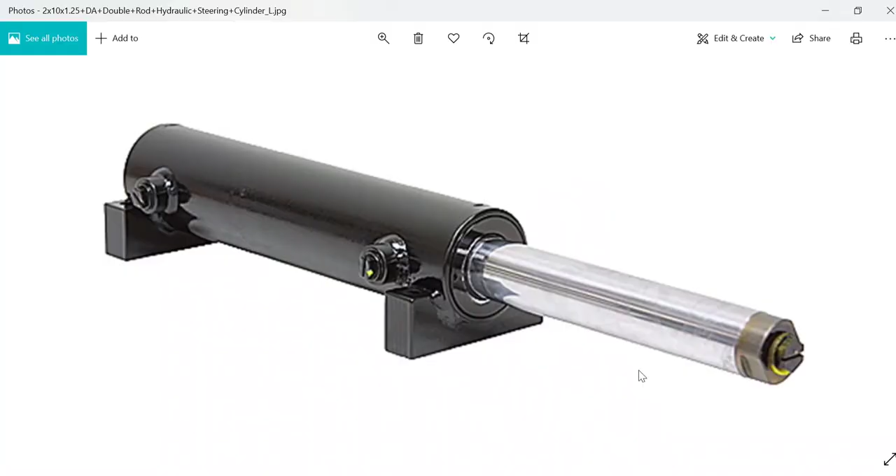So let's see what we're going to solve today. The component we are welding today is a steering cylinder, basically a hydraulic cylinder. This is just an example. It has an inlet port, an outlet port, mounting blocks, and it comes in a single acting or a double acting cylinder.

Let us move on to the 3D component of it, to give you a glimpse of how we convert the drawings into 3D, and then try to conceptualize the entire machine by understanding the cylinder here.

The cylinder you're seeing here is a typical 75 dia cylinder OD, with two ports, inlet and outlet, and two blocks, one on the left, for mounting only. There's another side view where you can see the bore, and an end cap which fits onto the cylinder.

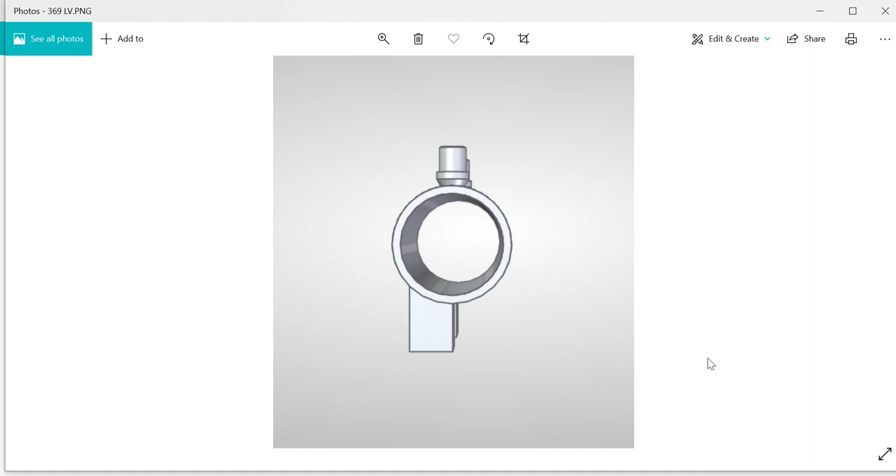So totally we will be welding in about three stages. One will be the ports, inlet and outlet. The second stage will be the blocks, and the third stage will be the end cap, which is not visible right now. So let's move on to the concept, guys.

This is the concept, basically how we design the entire system. Here you see three linear axes and two rotary axes. One is the torch rotary, one is the job rotary, and apart from these two rotary, the linear axes are x-axis, y-axis, and z-axis.

The x-axis is about 500 to 1 meter in stroke; the current system we've designed is about 1 meter. The y-axis is about 500 mm, and the z-axis is about 500 mm. The torch rotation we have limited to 730 to 760 degrees. The B-axis is a continuous rotary system.

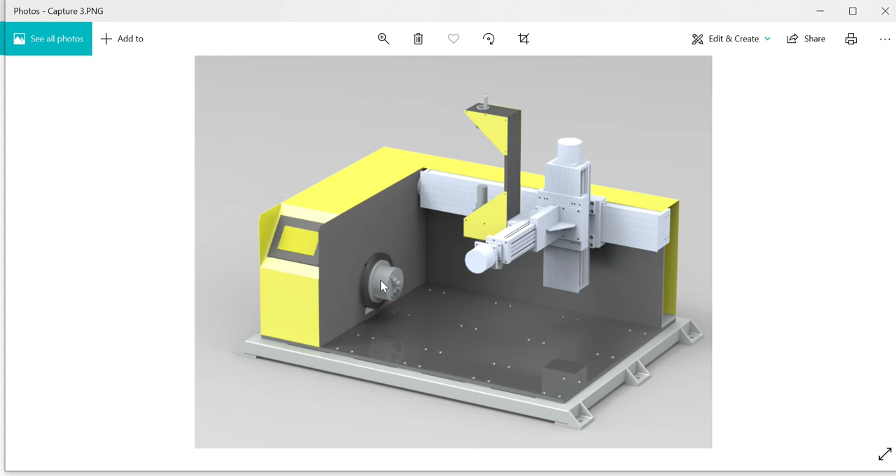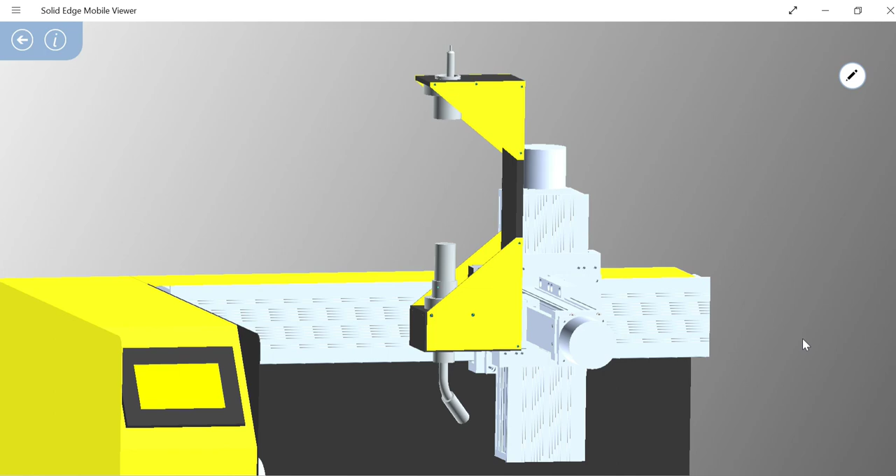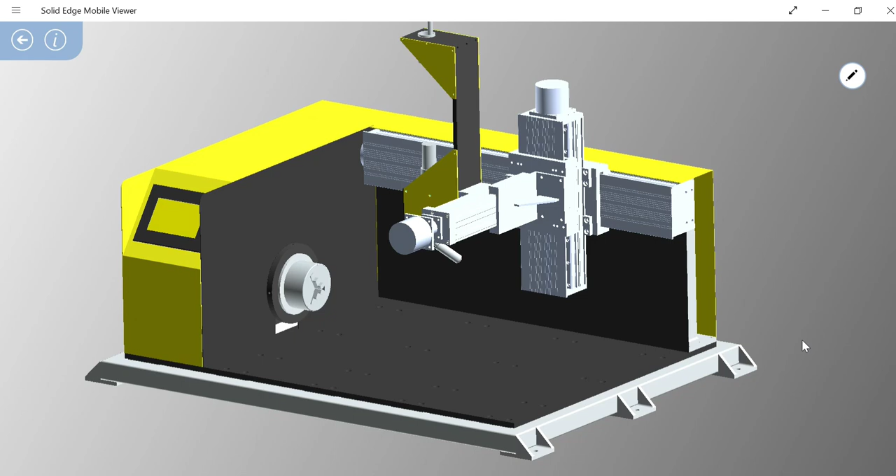The entire machine is basically a Cartesian system with two rotary axes. This machine has been patented in India about 4 years back, and in Australia just about 3 months back. The system we've patented is a complete Cartesian robo, along with the kind of program we are using.

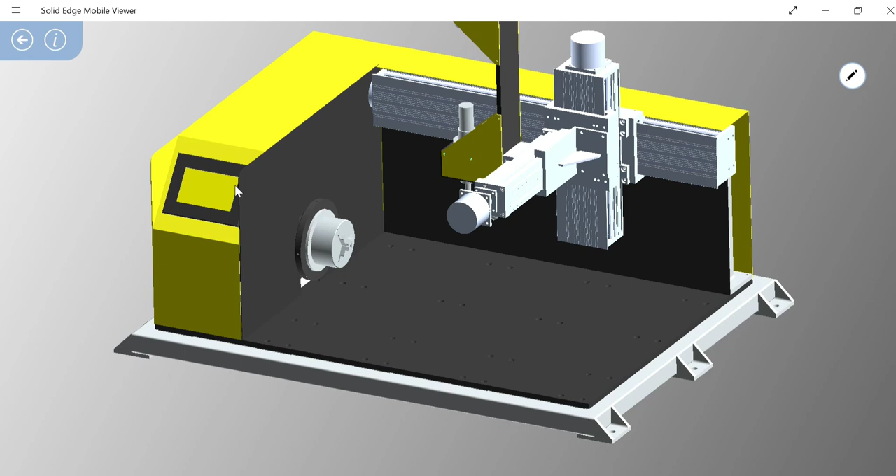Basically it runs on a motion control platform. The base platform you're seeing right now is a tabletop one. We'll be mounting this to a particular frame based on customer input. There is a 7-inch display on the left side. Most of our systems have displays on the left, so the operator has feasibility on his right for loading and unloading the component.

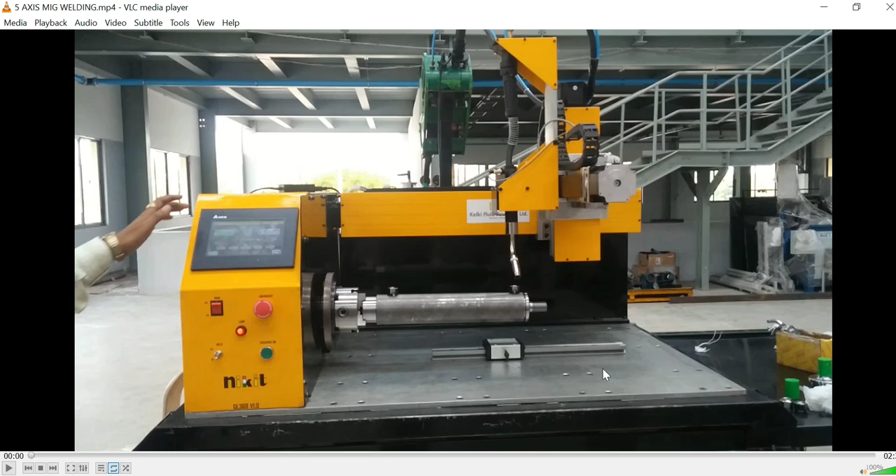So let us see how we have performed testing, assembly, and the entire process of how the product looks post welding. Before getting into it, let me show you the complete video. Here we are going to weld two ports and the end cover, or the end cap, as we call it.

So this is a machine exactly like the design you've seen, built. There's another tag, this is Nikit, and there's Kalki, our channel partner for the welding machine. So let's just start this process.

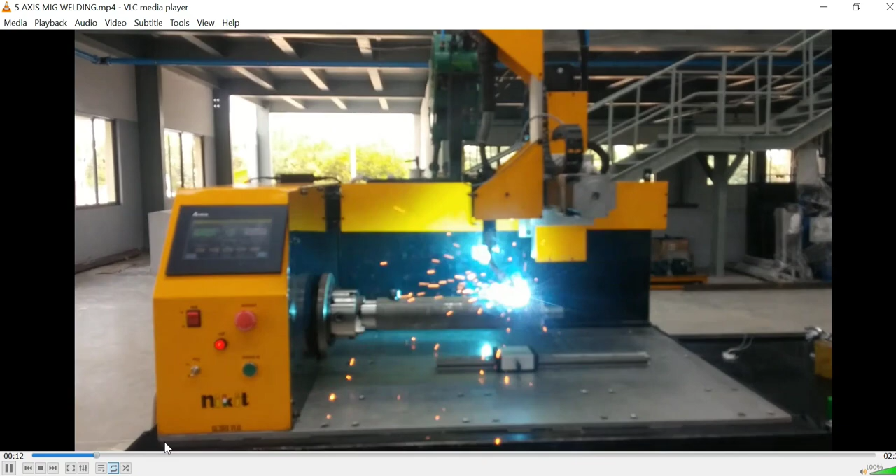As we press sequence on the control panel, you can see a sequence switch, the mushroom button for emergency, main on and off, an indication, and a weld on/off manual switch. Now the sequence has started, moving to about 180 degrees, then back to about 270, then back to 360 plus a 10-degree overlap, about 370 total. You can also manipulate it to 390 if you want.

This entire sequence happens with a 4-axis interpolation. The controller used here is a 6-axis interpolation one, but what we're actually utilizing for the sequence right now is 4-axis interpolation, where the x-axis, y-axis, z-axis, and torch rotary align based on two major criteria: the parent or mother diameter of the tube, and the child diameter of the port.

So if you have a mother diameter of 80 and a port diameter of, let's say, 25, you just input these two values. Our program converts that into a curvature profile that traces the component's depth at which it has to weld, because a normal circular welder cannot fulfill this criteria. You need a particular curvature to fill the bottommost portion of the port.

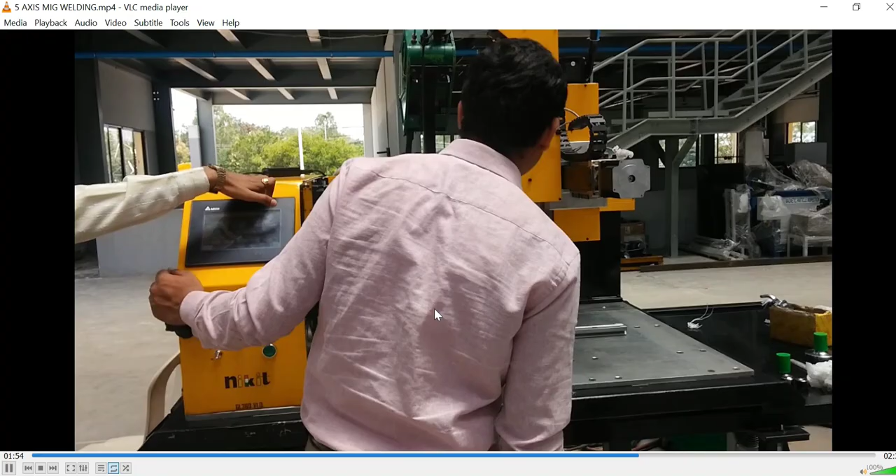Now you can see we finished welding 2 ports, and the machine is moving back towards the component end where the entire job rotates. So we have the end cap welding done. The end cap is fixed here by pre-tacking, and then the system rotates the cylinder and welding happens.

As you can see, the job is rotating. It's moved from 0 degrees to 90 degrees. You can see there's a V groove that they've defined as the joining groove, where they want the actual deposition of close to 6 to 8 mm to be welded or deposited.

You can also have weaving done here. There's an inbuilt switchover for weaving and for oscillation. The same.

So that's it guys on the port and end cover welding. Let's look at how we're going to weld the block.

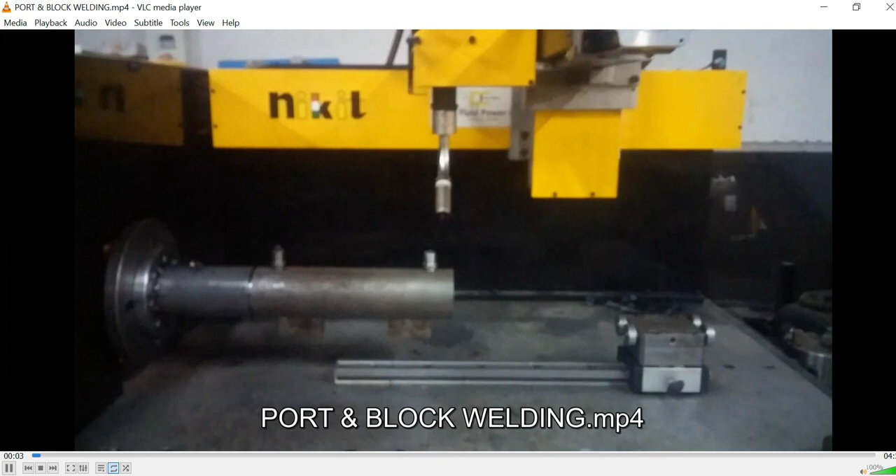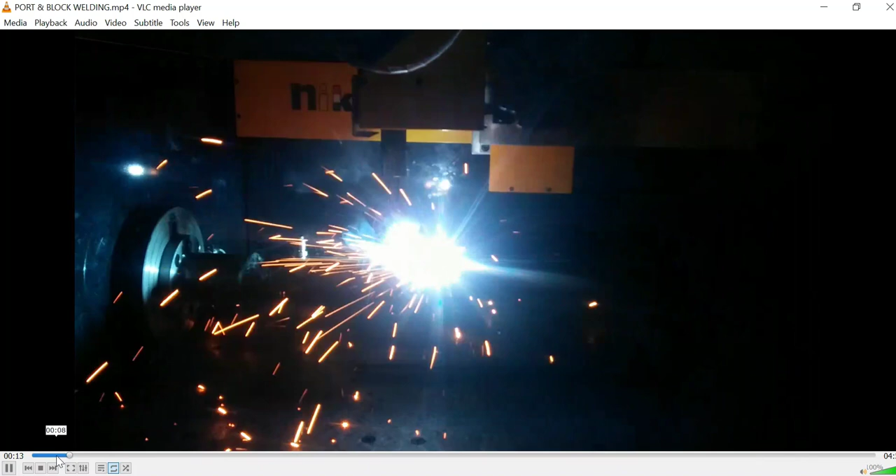Welding the block. Okay, so that was the first machine. This is the second machine with a different collet or fixture. And if you see, since the diameter is less, we have increased the speed also based on the diameter of the port as well as of the component, the mother diameter.

First port gets welded, now it moves to the second port. Basically the deposition is really high here because that's the criteria where they've given a certain gap and they wanted us to fill the entire gap. So this particular welding - now both ports get welded, the component rotates to about 180 degrees or 120 degrees where

the mounting blocks are placed, which are pre-tacked. The entire pre-tacking of mounting blocks and the inlet and outlet ports are done in a different fixture and loaded onto the machine. Now, as you can see, one portion of the linear weld is done.

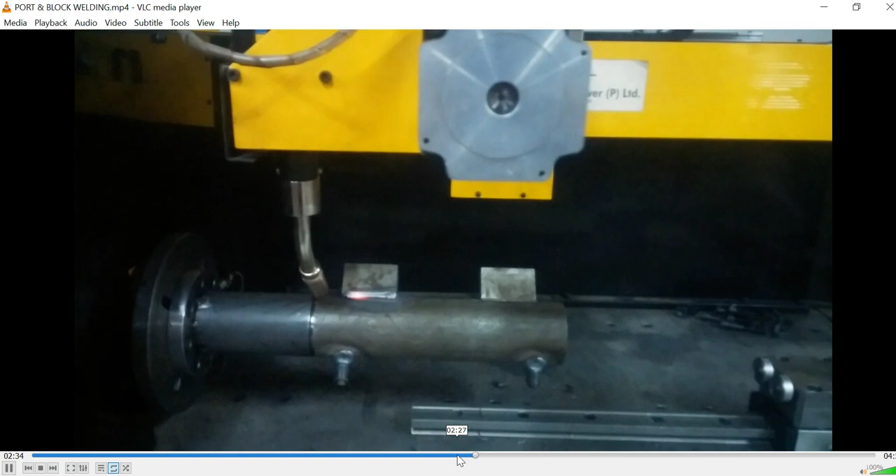Now the curvature of the block is being welded. I'll just speed it up a bit so that it's clear. It's a pretty slow process because initially when we started testing this particular program, we thought let us do it in-house with a much slower RPM, then we can increase it.

Right now the speeds can be varied up to 100 mm per second, but the weld video that you're looking at runs at about 10 mm per second to about 12 mm per second.

So as it finishes block number 1, it moves to the second block where first it welds the curvature. Basically the 4 components or the 4 faces of each block: one is the curvature face 1, then linear face 1, curvature face 2, linear face 2. All 4 are being welded here.

So once all 4 faces get welded, we have both blocks completely welded. You can also see the kind of finish that we have given. Finish always depends on the current, the voltage, and the speed of the system that you have set.

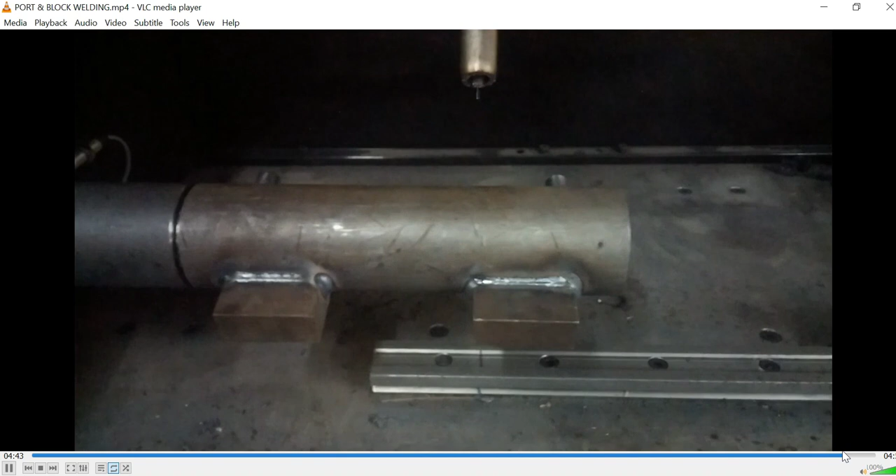Now moving back to the port welding component, I would like to show you how post welding, how the port looks with the kind of overlap that we had set. This is the kind of weld width that we have achieved on the port.

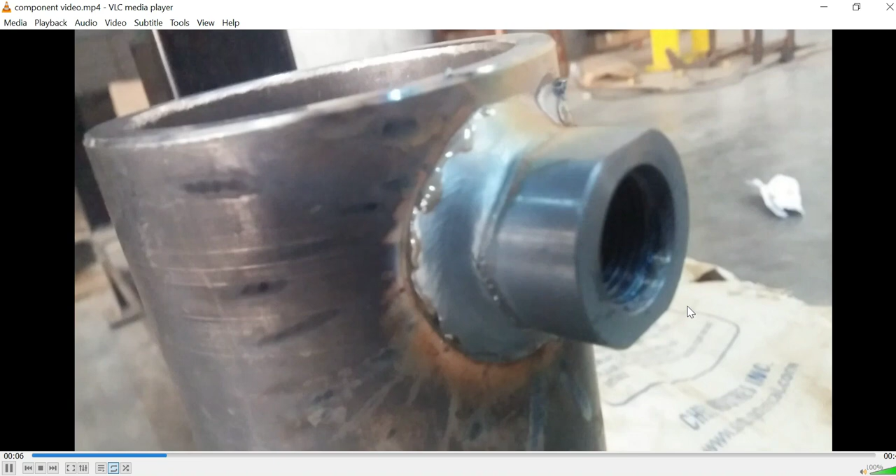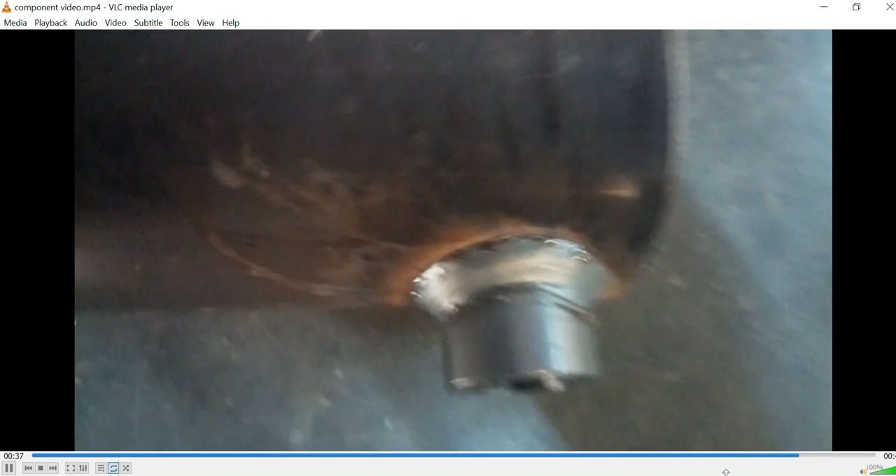But overall, if you see the entire phase of the weld, it's really good, and the kind of pressure that it takes care of is up to 300 bar. That's the tested pressure. Now moving back to the last phase, that's about costing.

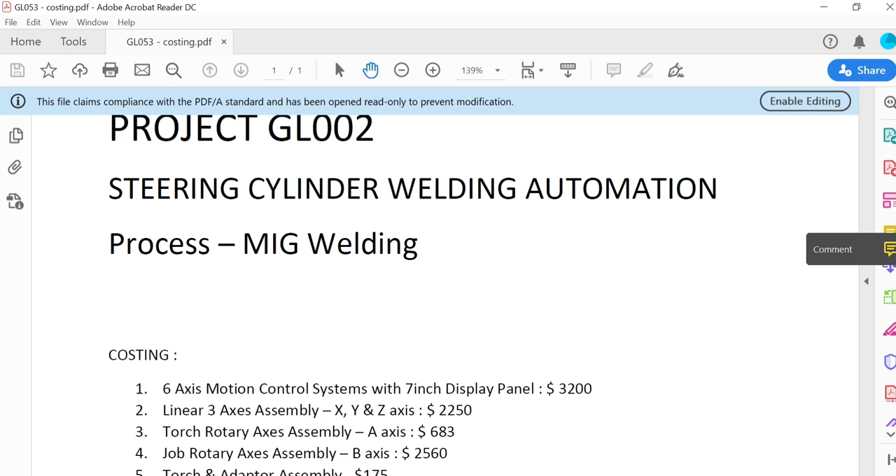Now for the entire project, the cost incurred, let me put this across. Okay, so here we are. The process is MIG welding. It's a steering cylinder welding automation. Process is MIG welding, and the costing for it is here.

It's a 6-axis motion control system, 7-inch display panel, costing $3,200. There's a linear 3-axis assembly which costs about $2,250. That's about $2,250, covering X, Y, and Z axis.

The next thing is torch rotary axis assembly, where A axis is about $683. Fourth component is the job rotary axis, our B axis, it's about $2,560. Basically the load that B axis can withstand is up to about 65 kilos.

And the next thing is torch and torch adapter assembly, costing us $175. Then is the fixture assemblies, basically a collet, spring steel material based collet for a single cylinder, costing us about $1,190. Then the final portion is basically frame and safety system. For frame, it's $1,760. For safety system, $650.

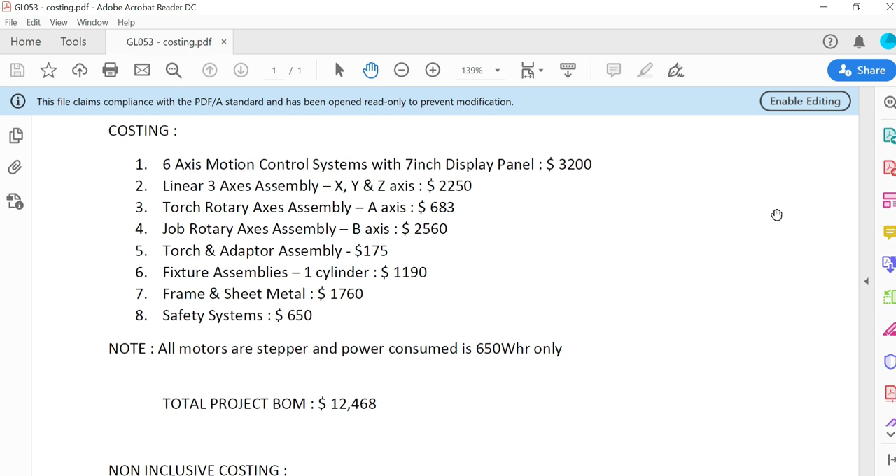Now one thing you should always look at is, guys, the power this system consumes. In any automation, power is a very important factor. Not today, but all through the year you run the machine, you have a very good average with our kind of system, because we use only stepper and the power consumed is hardly 650 watt hour. So the total BOM cost would be $12,468.

Now, since you all know that we classify our costing into two, inclusive and non-inclusive. For non-inclusive, we've not included labor - that is design, procurement, inspection, assembly test, electrical testing, and training. Next, the company overheads depend on individual companies. Consumables, basically this doesn't vary much - welding power source, welding wire, gas, and tungsten.

Here we're not using tungsten, but here we're using only the welding wire. Now, power consumption, installation, packing, and forwarding. All these factors play a very important role, guys.